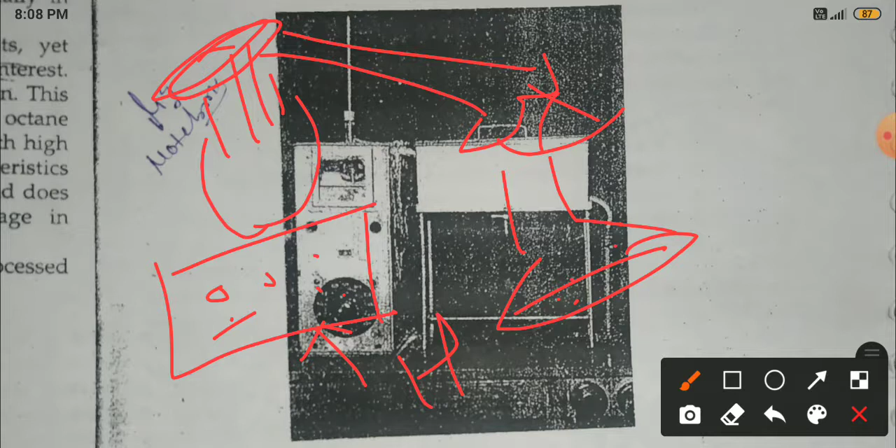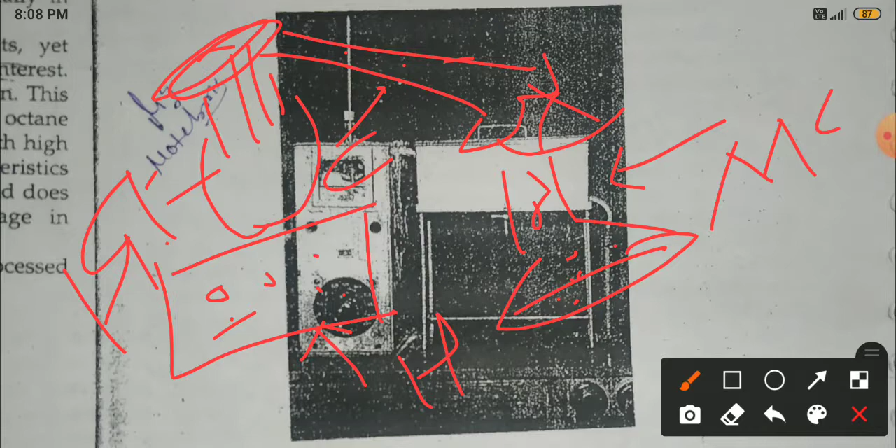Okay, so now start the discussion part, this one. Okay, so in this test 100 ml of sample is distilled in a standard flask at the uniform rate of 5 cc, that is, cubic centimeter per minute. The distillate is condensed in a brass tube condenser surrounded by a water bath kept at 0 degree Celsius by ice water and ice water mixtures also.

First drop from the condenser must be available in 5 to 10 minutes after heating started, at which the recorded temperature is mentioned as initial boiling point of the sample. The vapor temperature is recorded at each successive 10 cc distillate collected in this format.

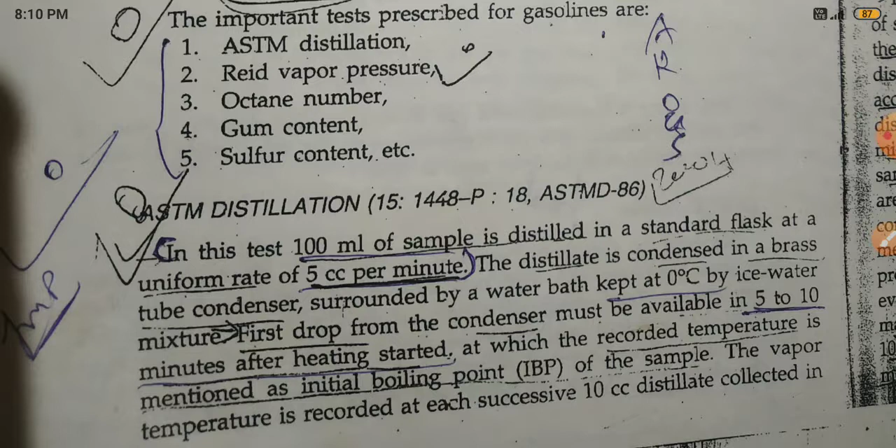Okay, again repeated, in this test 100 ml of sample is distilled in a standard flask at a uniform rate of 5 cc per minute. The distillate is condensed in a brass tube condenser surrounded by a water bath kept at 0 degree Celsius by ice water mixture, and the first drop from the condenser must be available in 5 to 10 minutes after

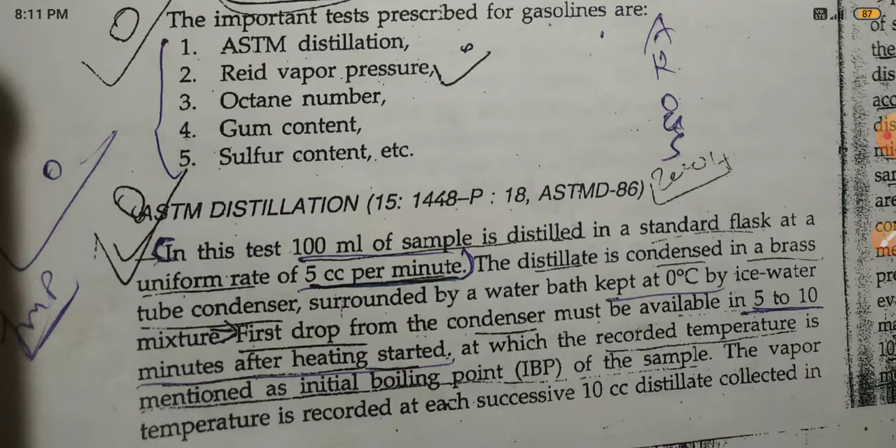heating started, at which the recorded temperature is mentioned as initial boiling point, that is, IBP, of the sample, and the vapor temperature is recorded at each successive 10 cc collected in this measuring cylinder. Okay, the test continues in the same way till 95% of the fractions is condensed.

At this juncture, the heat intensity may be increased to obtain the maximum boiling point, also known as end point, EP. See in figure 2.15, this one part. The ASTM distillation part simple figure is given, see this one. Okay, this is simply the heating section part.

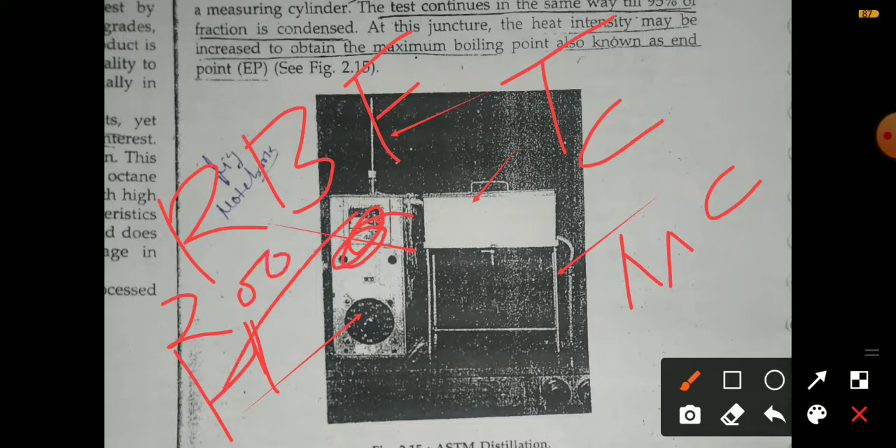Okay, in this test 100 ml sample is distilled in a standard flask at a uniform rate of 5 cc per minute and the distillate is condensed in a brass tube condenser, surrounded by a water bath kept at 0 degree Celsius by ice water mixture, and the first drop from the condenser must be available in 5 to 10 minutes after heating started, at which the recorded temperature is mentioned as the initial boiling point of the sample.

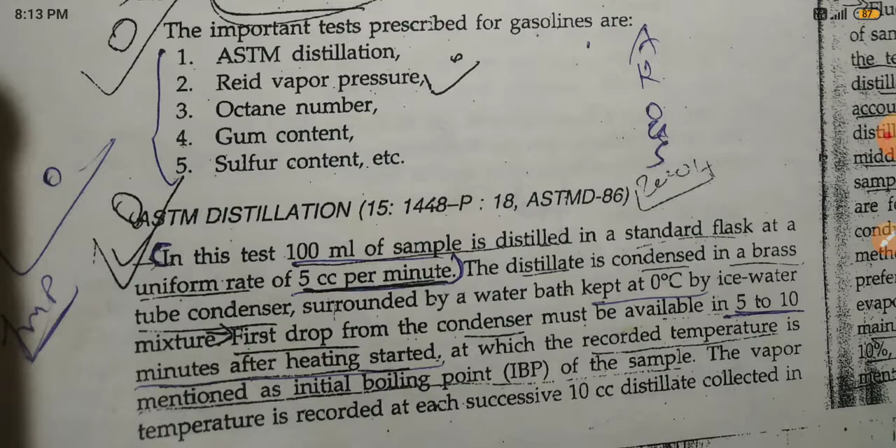The vapor temperature is recorded at the successive 10 cc distillate collected in this measuring cylinder. Okay, so draw the figure once, simple.

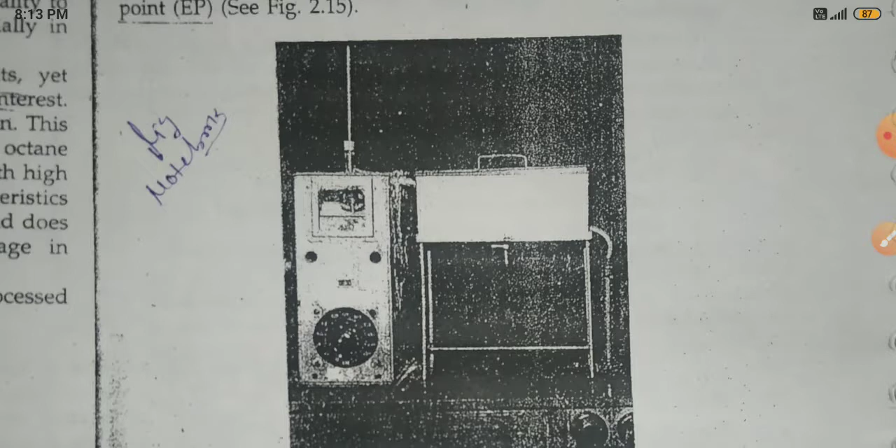Okay, the test continues in the same way till 95% of the fraction is condensed, and at this juncture the heat intensity may be increased to obtain the maximum boiling point, also known as the end point. See in the figure this point.

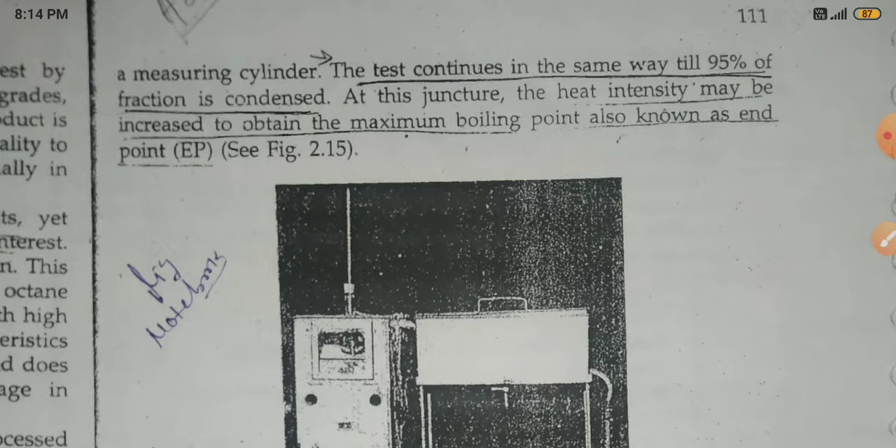Okay, the fluctuation in the temperature is common when the last 2 or 3 cc of sample are distilled, when the bottom of the flask shows dryness, and the temperature recorded corresponds to the final boiling point.

Okay, now at the temperature corresponding to the final boiling point, the distillate collected shall not be less than 98%, and the difference is accounted as loss, usually ascribed to light ends.

And this method of distillation is followed for most product specifications. When middle distillates like diesel are to be tested, instead of a 100 ml sample, a 200 ml sample is taken. Similar adjustment of heating rates is followed to obtain the initial boiling point in 10 to 15 minutes time.

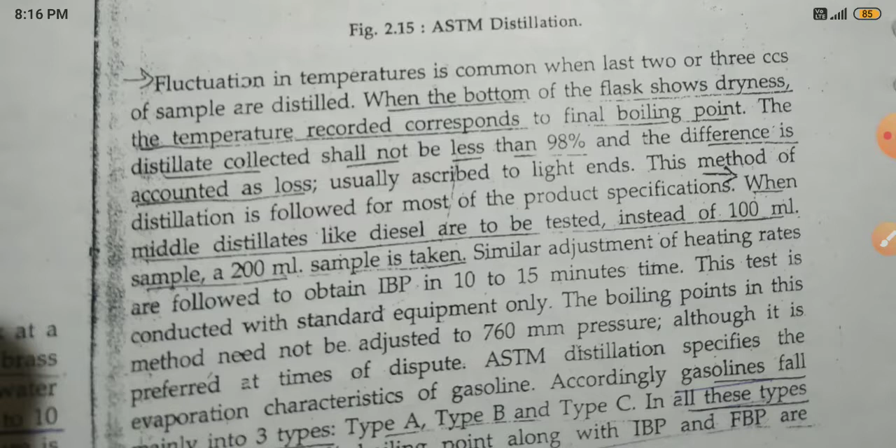This test is conducted with standard equipment only, and the boiling point in this method need not be adjusted to 760 mm pressure, although it is preferred at the time of dispute. American Society for Testing and Materials distillation specifies the evaporation characteristics of gasoline.

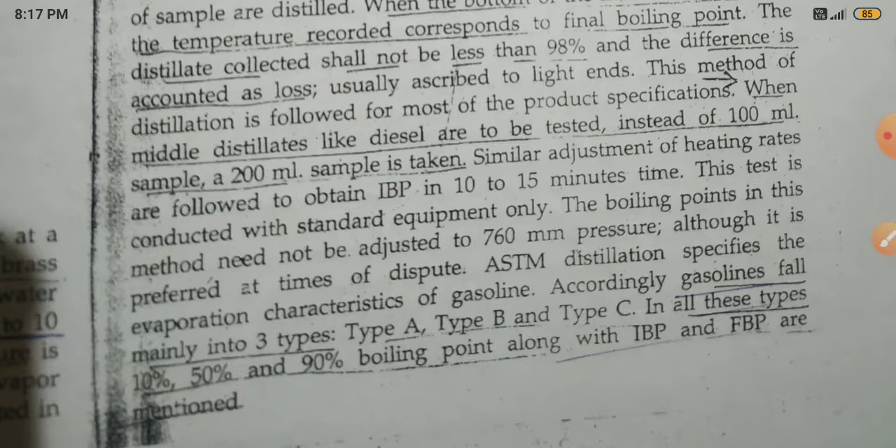Now, accordingly, gasoline falls mainly into three types: type A, type B, and type C. In all these types, the 10%, 50%, and 90% boiling points, along with the initial boiling point and final boiling point, are mentioned. Okay, so in this figure.

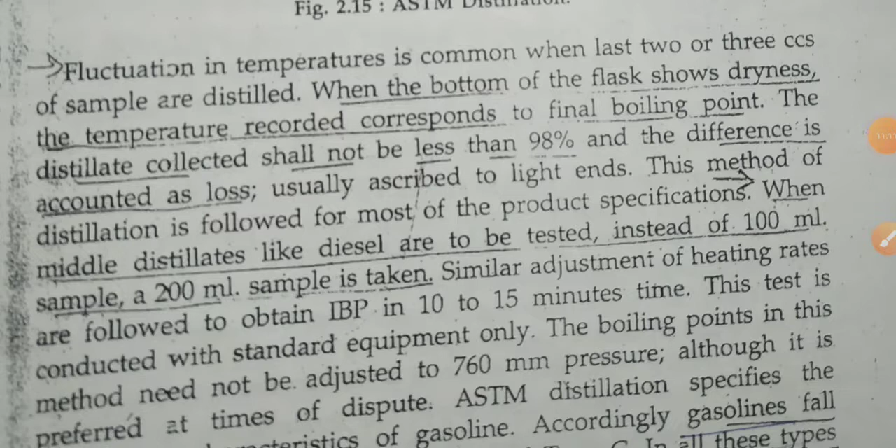Okay, now the final statement. What is the main point? This point is the most important: 10 to 15 minutes to the initial boiling point. Okay, the fluctuation in temperature is common when the last 2 or 3 cc of sample are distilled.

When the bottom of the flask shows dryness and the temperature recorded corresponds to the final boiling point, the distillate collected shall not be less than 98%, and the difference is accounted as loss, usually ascribed to light ends. This method of distillation is followed for most product specifications.

When middle distillates are tested, instead of a 100 ml sample, 200 ml can also be taken, and similar adjustment of heating rate is followed to obtain the initial boiling point in 10 to 15 minutes time.

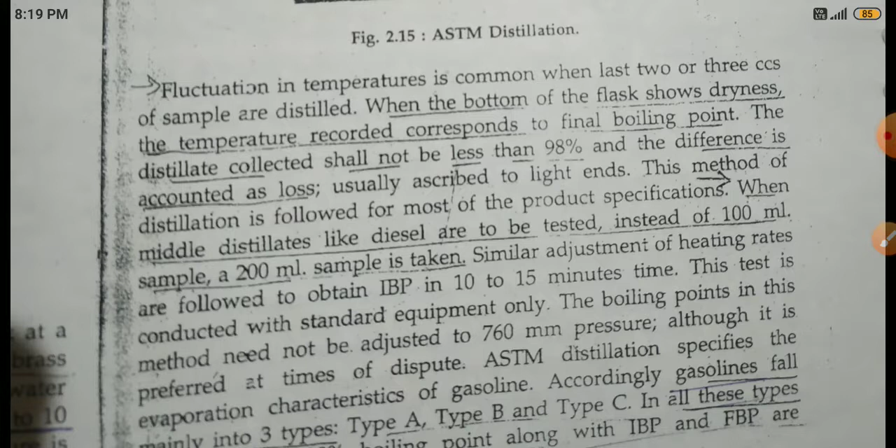Okay, this test is conducted with standard equipment only, and the boiling point in this method need not be adjusted to 760 mm pressure, although it is preferred at the time of dispute. American Society for Testing and Materials distillation specifies the evaporation characteristics of gasoline.

And accordingly, gasoline falls mainly into three types: type A, type B, and type C. In all these types, the 10, 50 and 90 percentage boiling points along with the initial boiling point are mentioned.

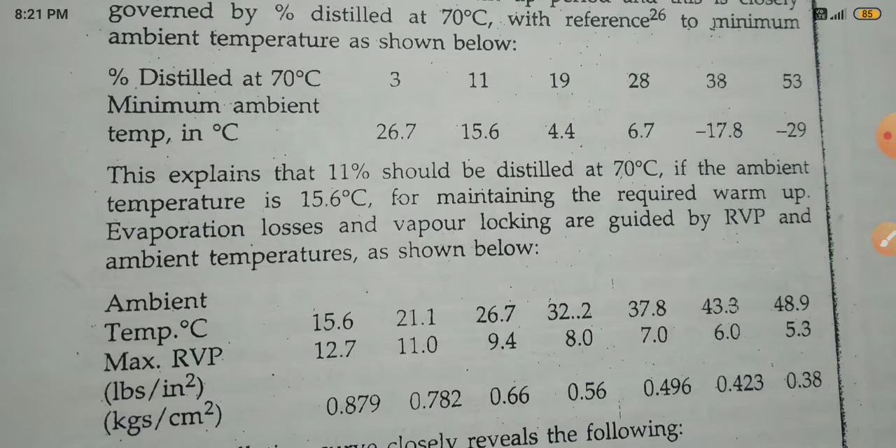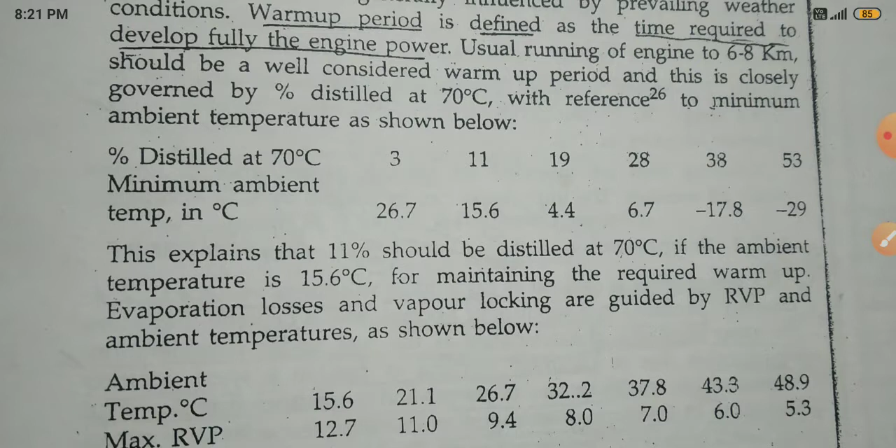Okay, and the 10% boiling point is the basis for flash point, ease of starting, vapor losses, vapor locking. The 30 to 60 boiling point range gives some information on the warm-up period and good evaporation. Okay.